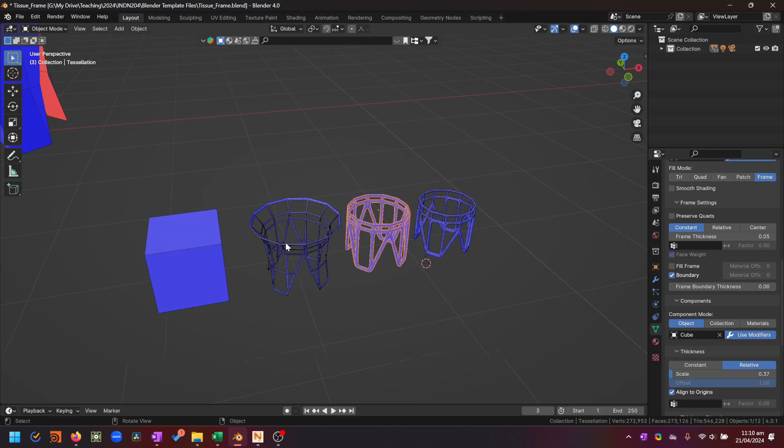Okay, so we need to take our designs into Netfabb to check their wall thickness and check that they are all ready to print. One of the first things we probably want to do is make sure that our scale is going to be accurate. So if you haven't been doing this throughout the project, or for the last few iterations, making sure that your scale is at an accurate and kind of reasonable size, best to do this now.

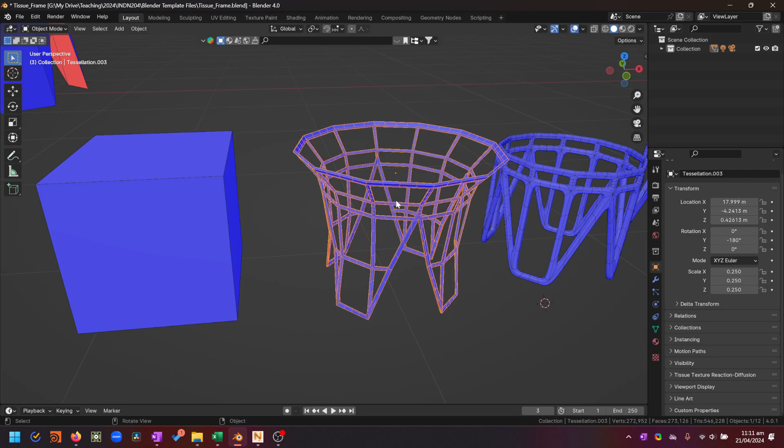So make sure that you're able to create an object that can let you see the scale, or that you are measuring the scale on the edges of your geometry by checking the edge length of the geometry. The easiest way of doing this is pulling a cube into your scene, and then editing that cube.

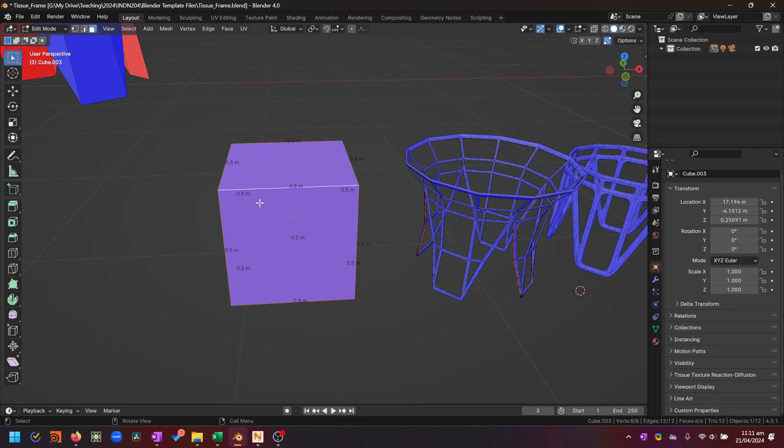So going into edit mode and selecting the cube and scaling it in here so that your scale multiplier here under your object properties tab remains at 1, 1, 1. So that way you'll get a realistic sense of the size and scale of this edge or any of these edges relative to basically everything else in the scene.

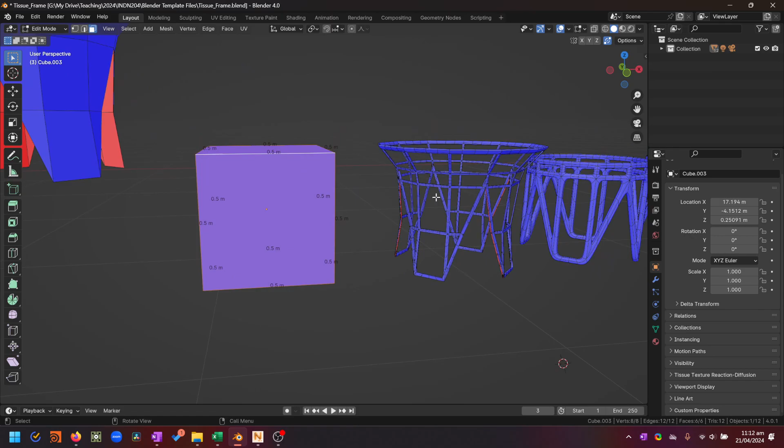So you can see here I've got the face orientation on so that I can check and see if there's any flipped faces or broken areas of my geometry. And I also have the edge length measurement turned on here so that I can see the edges in this cube. And so this edge is about half a meter.

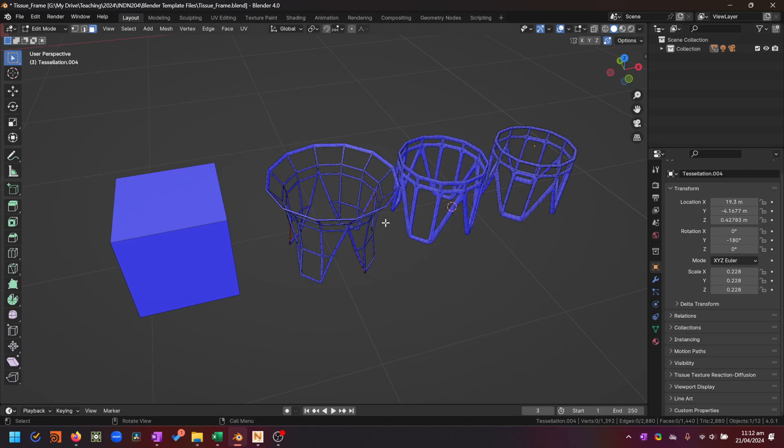And for these kind of coffee table sized things, that's going to be roughly where I want it to be. So I know that when I pull this into Netfabb and look at it, it's going to be roughly half a meter or 0.6, 60 centimeters, 600 millimeters across the top here. And then I can scale it accordingly.

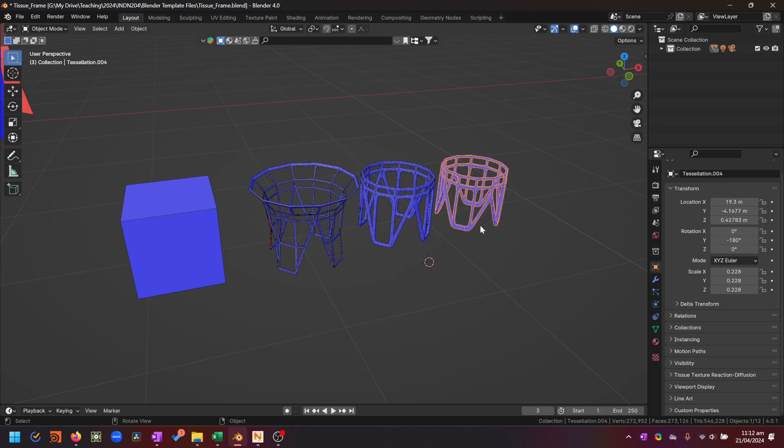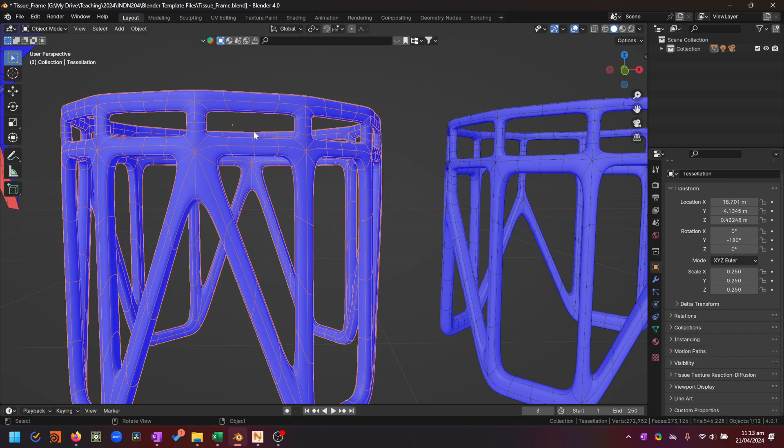Okay, so let's export these objects individually. So we'll grab this one here. This one's broken, but that's going to show you what happens in Netfabb and what you can and cannot fix in Netfabb. And then the other two are where you should be at, which is nice clean geometry, clear flow of topology, and no visible errors in the surfaces at all.

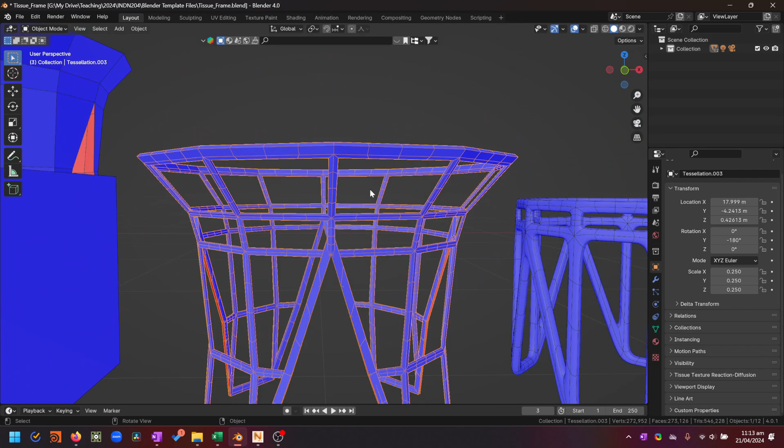Here, you can clearly see these visible errors with self-intersecting faces, things that are just not lining up properly, going through each other, back to front surfaces and things like that, and very thin geometry as well. So when we perform a wall thickness on this, it's probably going to fail.

Okay, so from here we can select our output, go to File, Export STL. Let's create a new folder on the desktop, and we will call this... Yeah, cool. Okay, we've got 204 and we'll go into test STLs here. That's the folder I made for this.

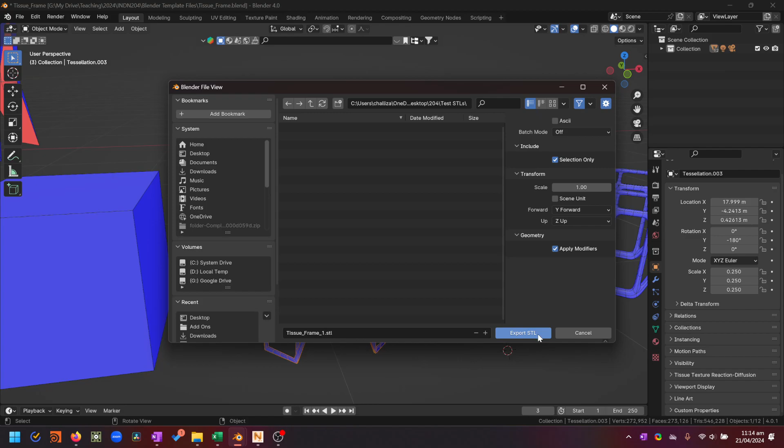I've got tissue frame. Let's just call this 1. Gonna make sure we're including selection only here. And we're going to apply the modifiers here. So we can go now export STL. And then I'll show you how the scale affects things by exporting these two slightly differently.

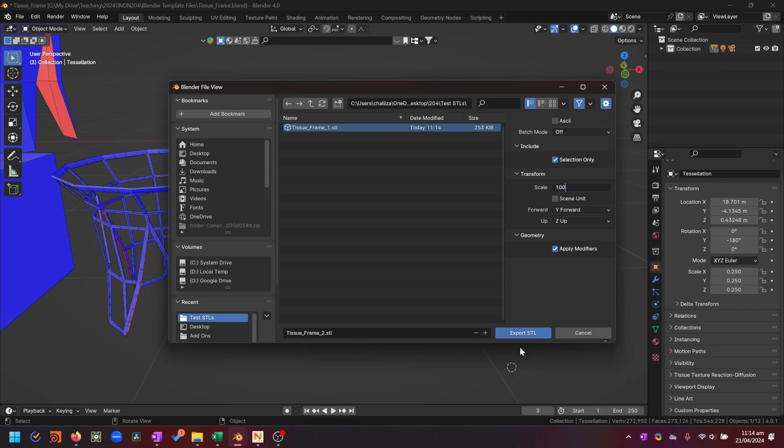So we'll take this one, export this STL file, call this tissue frame 2, but this time we're going to scale it up by 100. And then we're going to export STL. And then this one here, we're going to do the same, export STL, and we're going to scale this one up by 1000. And we're going to call it tissue frame 3.

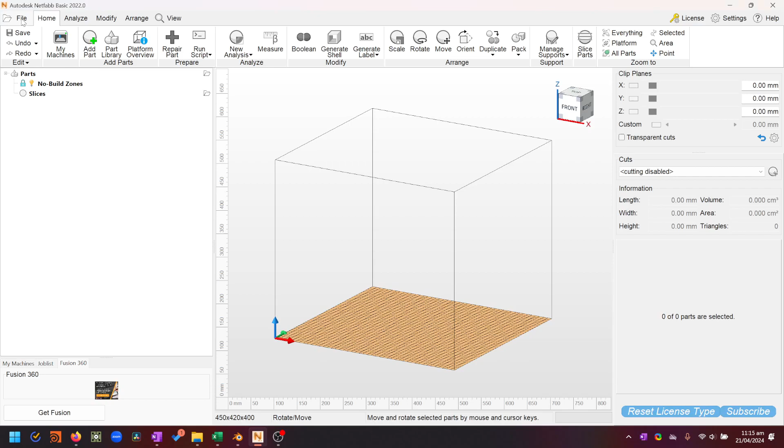Okay, so now that we've got those exported, we can jump into Netfabb and import them. So we'll go add part, and we'll go to test STLs, and we'll choose tissue frame 1 and open this one. Cool. It's showing us that there's a problem with the quality.

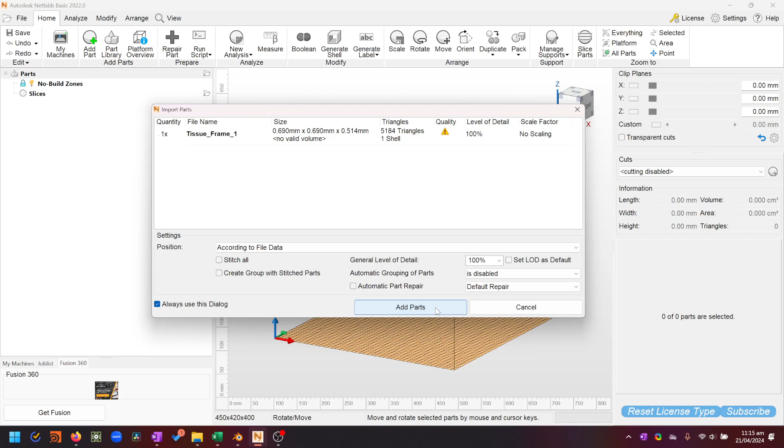So you can also see here that as we pull this in, our size is 0.6 millimeters, so that's under 1 millimeter. So this is clearly a problem with the scale. But let's add that part anyway, and we'll zoom in on it, and we'll see that it's way, way too small.

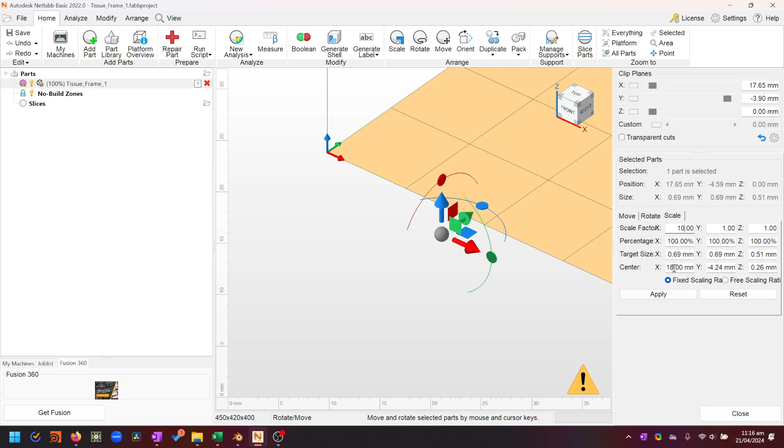So we'll go to scale this up. We'll select our tissue object here, or select our STL file here, go to scale, and scale factor, we'll go 10, and we'll make sure that it's fixed scaling, and we'll hit apply. Okay, cool. So now when we select this object here, we can show that its size is 6.9 millimeters.

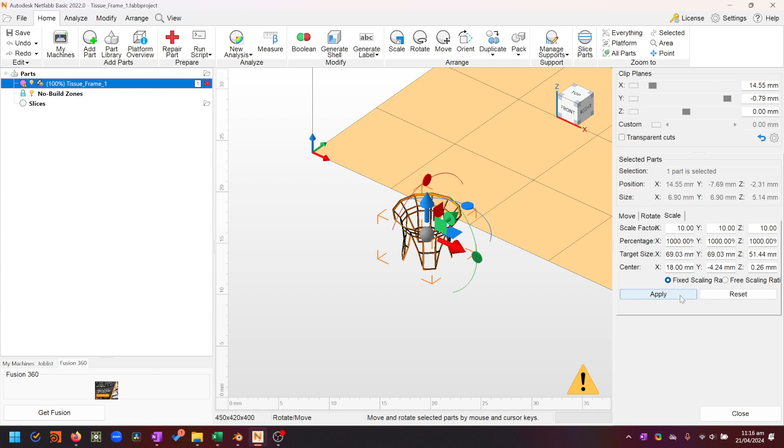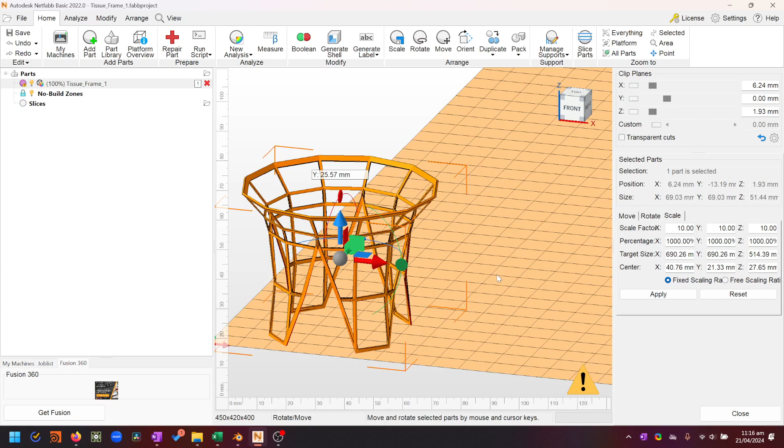So again, too small. So we can scale it up by another factor of 10. You'll notice that these remain the same. So if we apply that now, then we have this, 69 millimeters and basically 70 millimeters across, 7 centimeters across. So this kind of fits within our 100 by 100 by 100 millimeter ballpark that we're aiming for the STL print size.

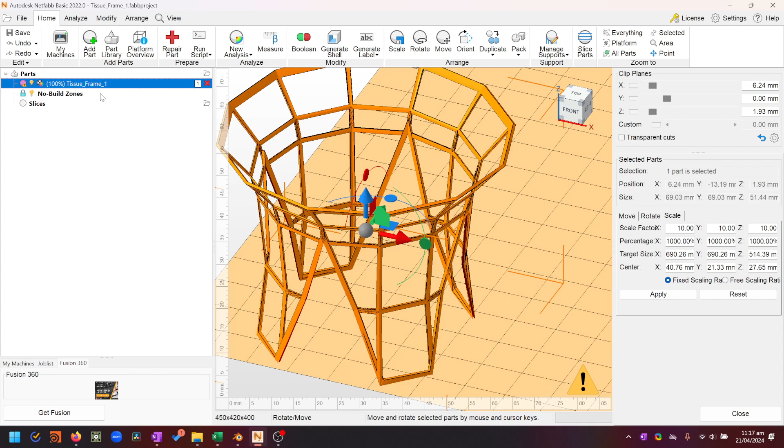Okay, so the next thing we might want to do is maybe jump out of our scale tool and maybe we want to do a part repair, or at least kind of analyze the part. You can kind of see here we've got this big exclamation mark saying there's issues with our part. So if I click on part repair here, if we zoom in, we've got some edges that are not unclosed, but they might be back to front. So let's see if we can repair this. The likelihood being we can't, but we'll give it a go anyway.

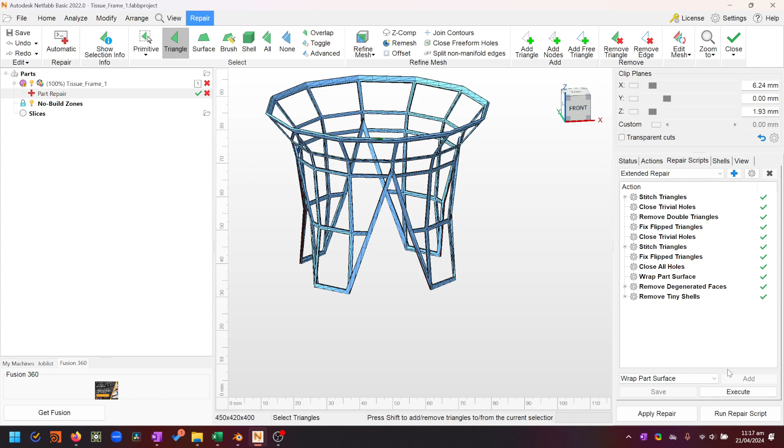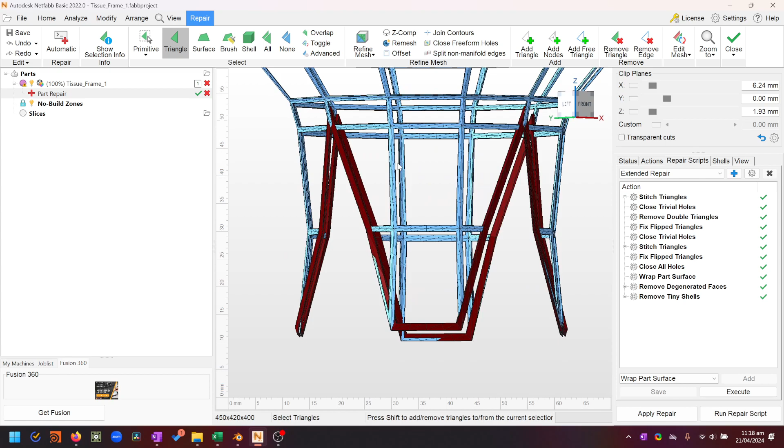So we'll select our part repair process here, jump into the repair script, and we can go extended repair, and then run repair script down here, and we'll see what happens if we click execute. Okay, cool. So it's actually made it worse. It's flipped these kind of broken areas inside out, and generally just made a mess of the mesh. And that's to be expected because it's just not a good mesh. You can't really fix something like that. You need to have control over that in Blender itself.

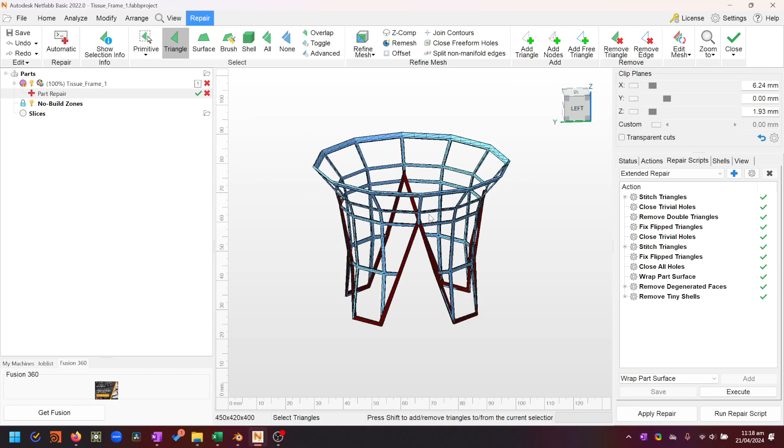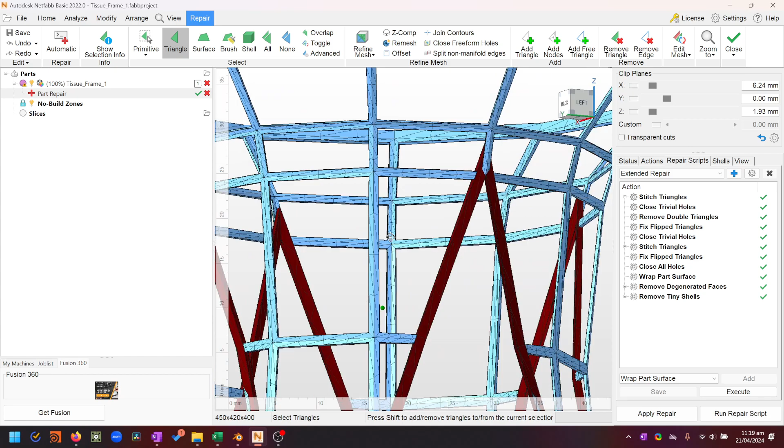So it kind of means going back to the component, going back to the base mesh, and making sure that those actually work together to create a viable mesh for output. That's pretty much the only way of repairing something like that. If you have minor issues with the mesh, we can repair those using a repair script, but not where you've got these massive areas that have just flipped inside out. That's just not going to work. But that is the repair script, and sometimes it will help you and sometimes it will make things worse.

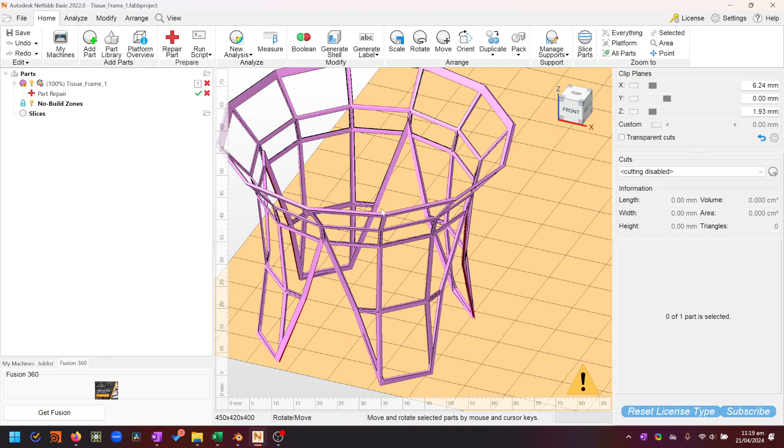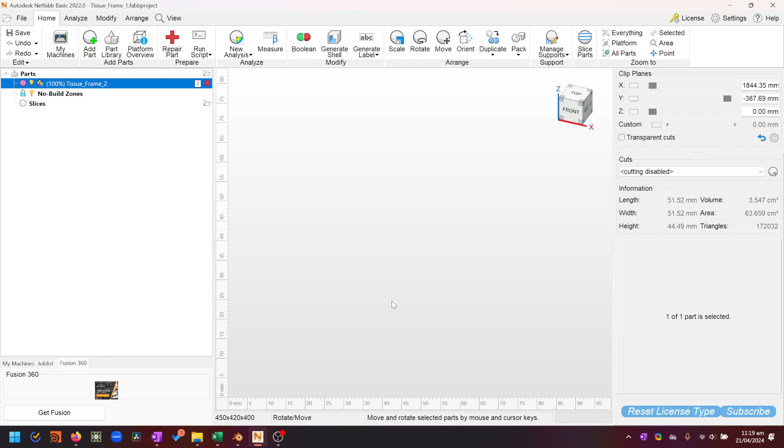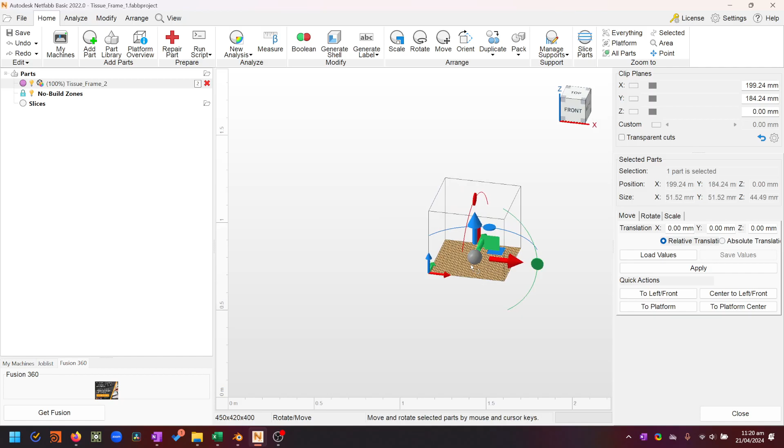Okay, so since this isn't really a viable mesh, let's have a look at something that is. Let's right click and remove this part. Yes, and let's try adding frame 2. Quality looks good. That's generally a really good sign if you've got the green check when you bring it in. And we'll add that part. It's off here in the distance, so maybe we want to center this part. We can do that with the move tool: go to platform center, and that will quickly move that part right into the center of our platform.

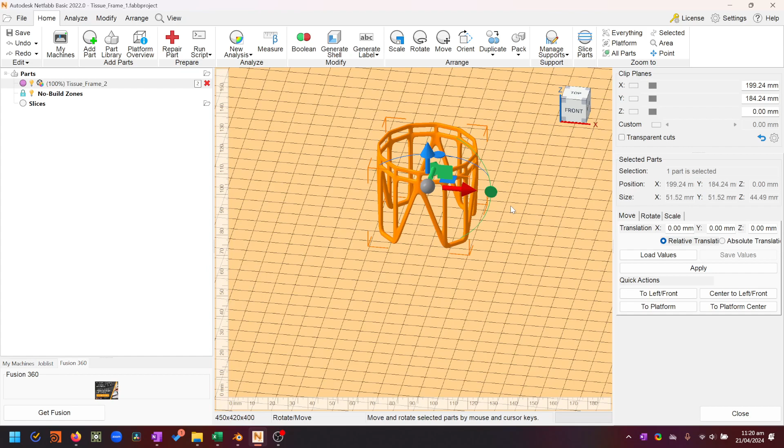If we have a look at the size, then that was good. This is the one we scaled up by 100 times. And that's taken it to 50 millimeters by 50 millimeters by 45 millimeters, which is within the scale that we want for our SLS printing. Let me just move this over here so it's right at the corner. And this one we can run a wall thickness analysis on to check that we are not going to have any issues with the print quality.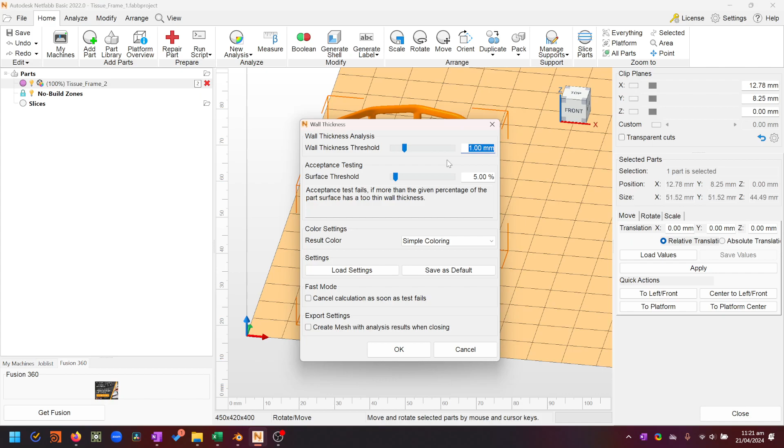So if we select our tissue frame 2, go to new analysis and click on wall thickness, we can use this wall thickness threshold to check that we are within the wall thickness allowance of SLS printing, which is generally about 1 millimeter. So if we put 1.0 in there and hit enter, it gives us a 1 millimeter threshold. And now when we click OK, it runs a wall thickness analysis to make sure that everything is above that threshold.

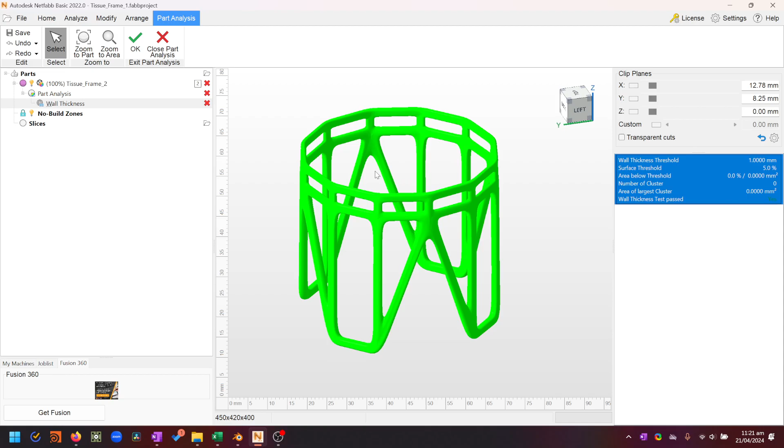Okay, so it's all green, which is great. That means everything's above our wall thickness threshold. So you probably want to screenshot this because you'll need to submit this.

Maybe let's have a look at something that might fall under that wall thickness threshold. So if we jump back into Blender and just do a few edits on this, let's go to our tissue settings here, and let's just reduce the frame thickness until we have something that's really not going to work. Okay, and we will go File, Export, STL, and we'll export this one as 4, and we remember that our scaling was right if we were in real world scale in Blender.

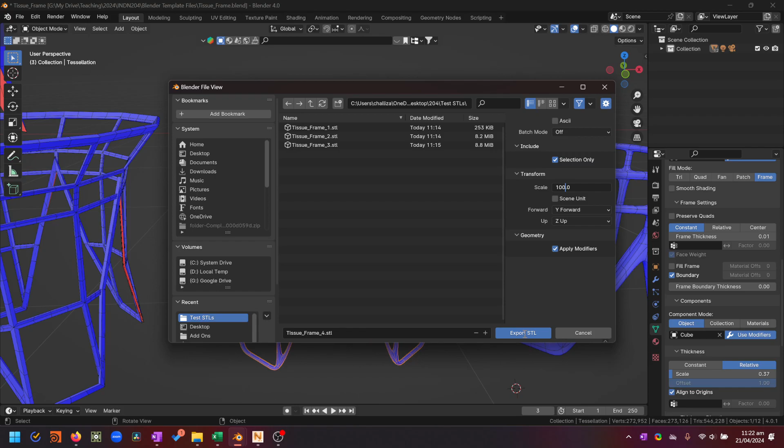If we scale by 100, it'll get us within the 10 centimeter boundary in Netfabb. Or at least for this file it will. You will have to figure this out for your own work. But generally, if you're working within a meter by a meter within Blender and in Blender units, then a scale of 100 will get you to the right scale for SLS printing, or at least for our usage of SLS printing. So we call that tissue frame 4. Going to export the STL.

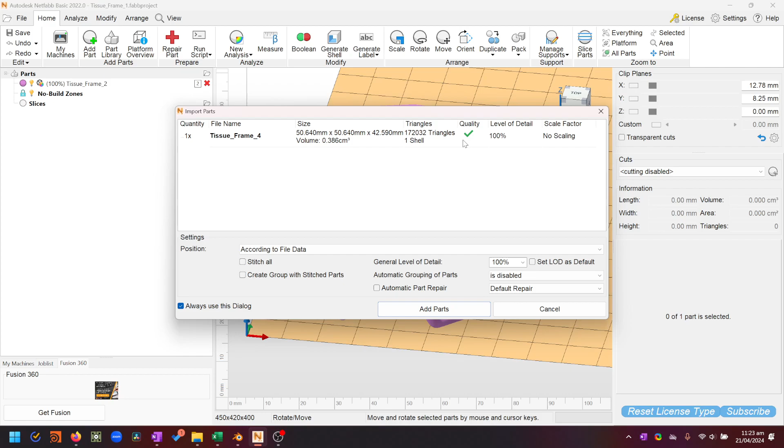We'll close the part analysis here, and then we can either remove this part, or we can just add a new part. Select tissue frame 4 here, open that, and you'll see 50 by 50, that's perfect. One shell, that's perfect. If you have seen the last Netfabb video on repairing things with multiple shells, then it's important to just have a single shell. And we've got a few triangles there as well, and we'll check that our quality is right. Okay, cool. So we'll add a part, and cool.

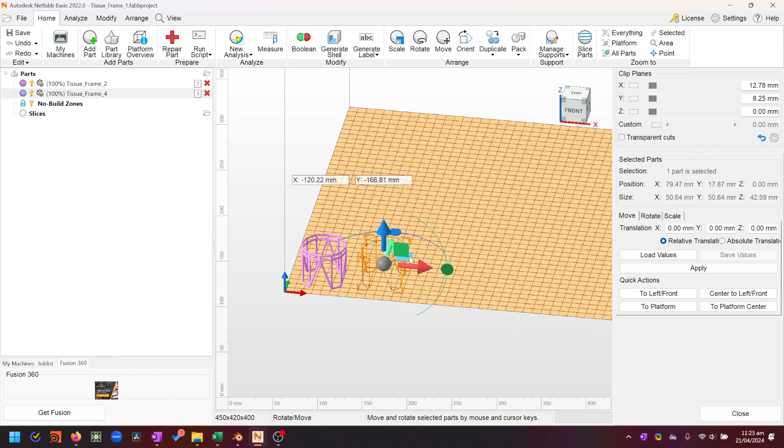Over here, again, we can go to move, and we can move it to the center of the platform, and then we can find our platform again, and here we are. So this one here, if we check, you can see that these areas here are just substantially thinner than these ones. So I already know this isn't going to print, but it's worth seeing what happens when we run a wall thickness analysis on this as well. And again, we'll change that to 1 millimeter. So just type 1, press enter, hit OK.

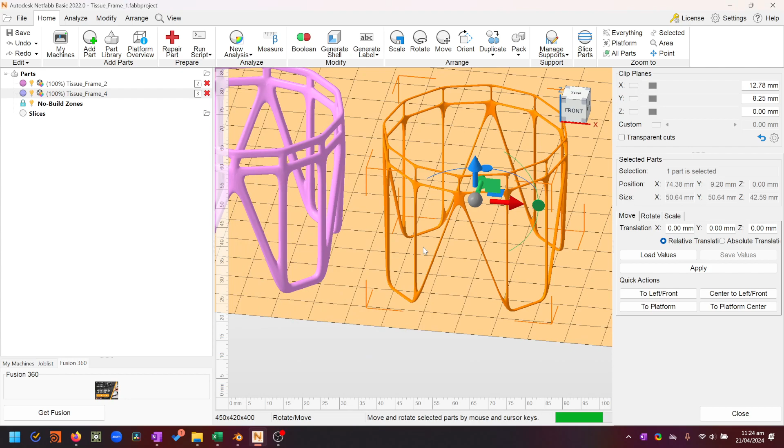And then when we run our wall thickness analysis on it, it's going to show us basically that nothing's in the green here. So we can see here that only maybe some of these really thick areas will print reliably, and everything else is really under this 1 millimeter threshold. So if you run a wall thickness analysis and there's lots of red on it, it's just probably not going to print. Again, another thing you're just going to have to go back to Blender and change.

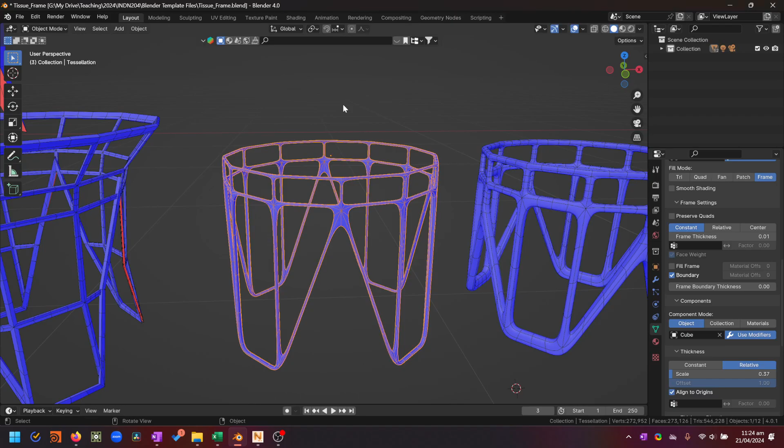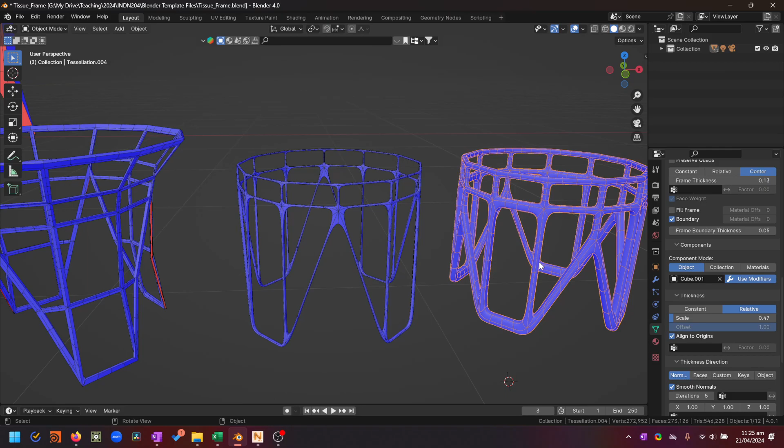In all of the settings for all of the different tessellation modes, you're going to have thickness scales and frame thickness scales for the frame fill mode. But for any of these other fill modes, you're going to have thickness scales and things like that you can use to beef up the boundaries of your mesh. And you're going to have to do that carefully, and with the same simplicity of components and base meshes in mind, because otherwise, if your meshes are too kind of all over the place, it's just going to cause more problems.

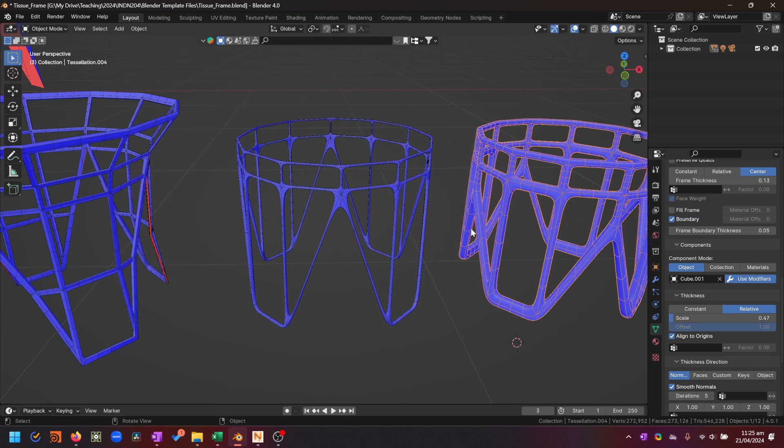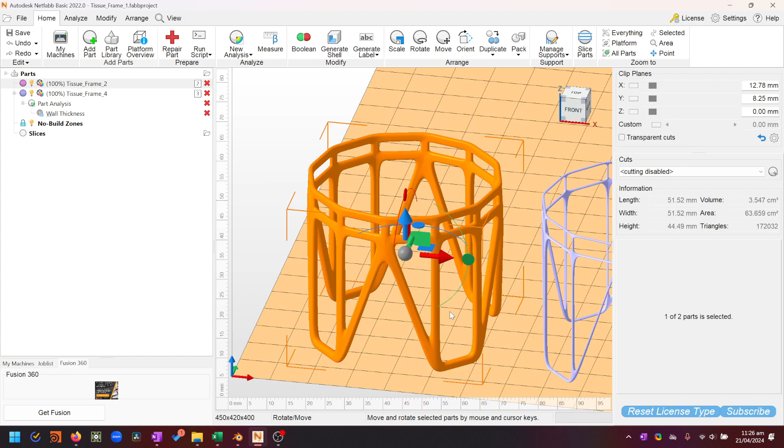Cool. So hopefully that has shown you how to do the thickness analysis. You'll see that submitting your thickness analysis is going to be a requirement just to make sure that when we send your files away, they are all ready to print and won't result in lengthy back and forths between the manufacturer and yourself. So it's a part of covering yourself, making sure that you're not going to waste your time or your manufacturer's time in creating more problems for yourself, by not observing your geometry and making sure it's ready to be submitted for manufacture.